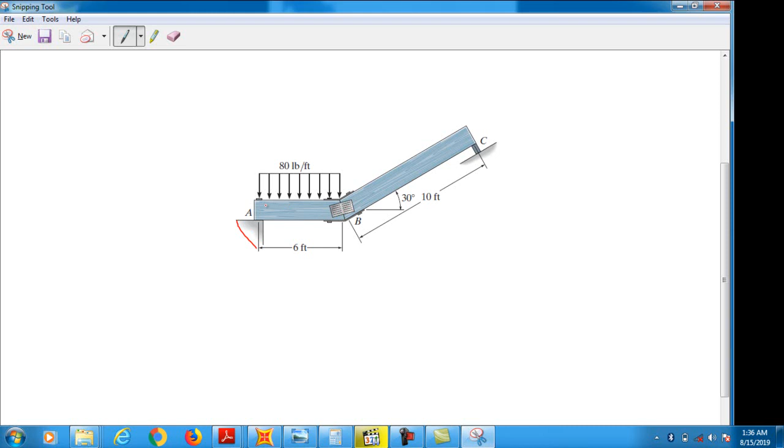So you will understand how we will model such kind of beam, and we also have to rotate this joint, as we did in lecture 14. So the beam is simple. I just want to explain how we will model this kind of structure.

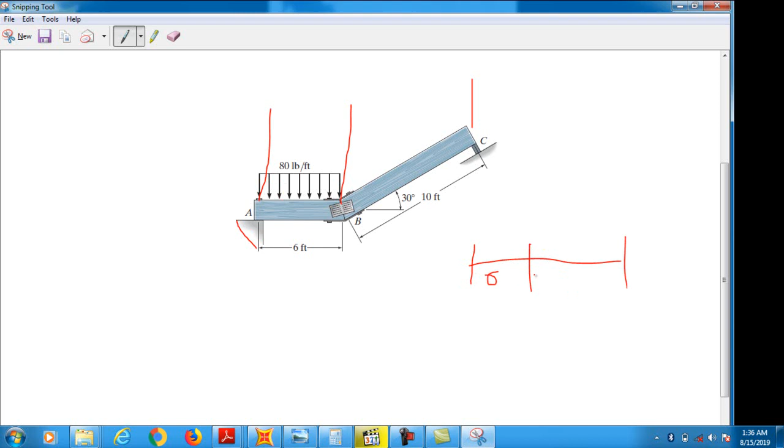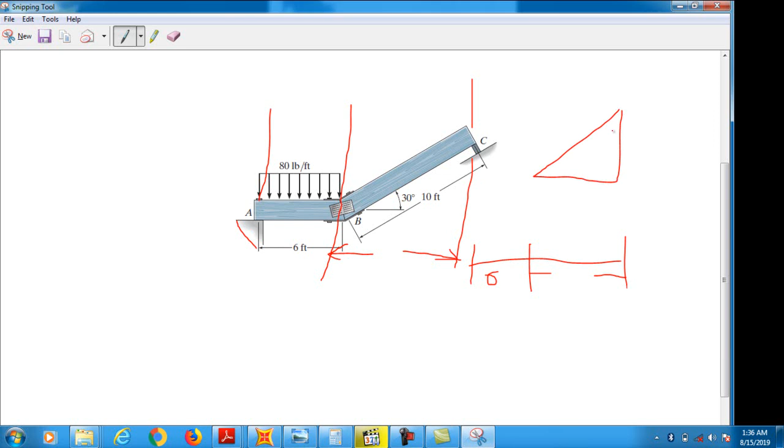So we will use grid spacing. Let's say we have x1, x2 and x3. So in x direction we have three axes, x1, x2 and x3. These two axes are at a distance of 6 feet, and for these two axes we need the horizontal distance, which we can determine from this inclined length and this angle. This is a right angle triangle, using the trigonometric relationships. This is 10.

So using trigonometric relationships, this x distance can be found by 10 multiplied by cos 30, that is roughly 8.66, and this y distance equals 10 times sine of 30, which comes out to be 5. This angle is 30 degrees, so we need to rotate this joint by an angle of 30 degrees. So this is the whole data we need for modeling this frame section.

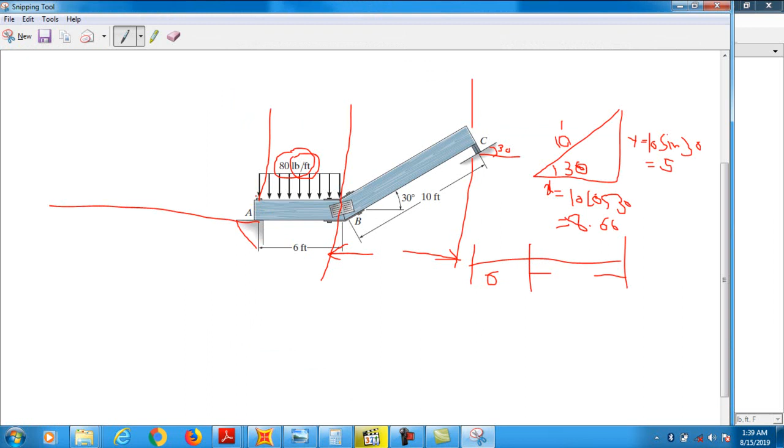80 pound per feet loading is applied, and these are our required units. So let's start. Make sure the units are in pound feet. Select template using grid spacing. Grid spacing: we have three axes in x direction, and in z direction we have z1, ignoring the depth of the beam, and z2, and this height is determined here, that is 5 feet.

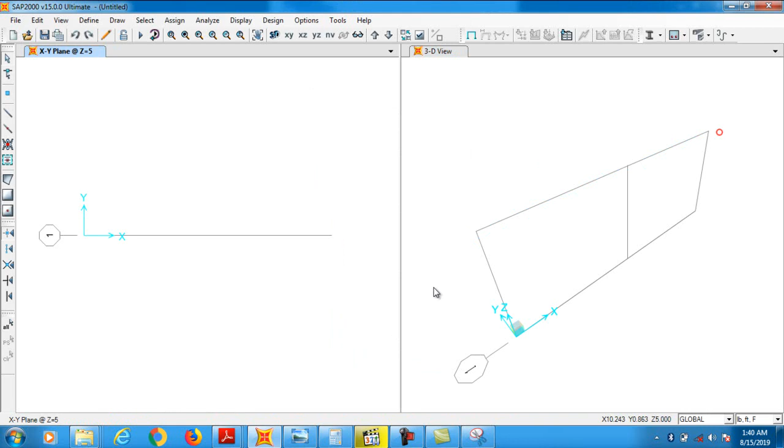So in z direction we need two axes. Let me assume this equals 6 feet. Y is 1, and the vertical height is 5. Now we edit the spacing. Make sure you are in the xz plane. Let's edit the grid spacing, and the spacing unit should be feet.

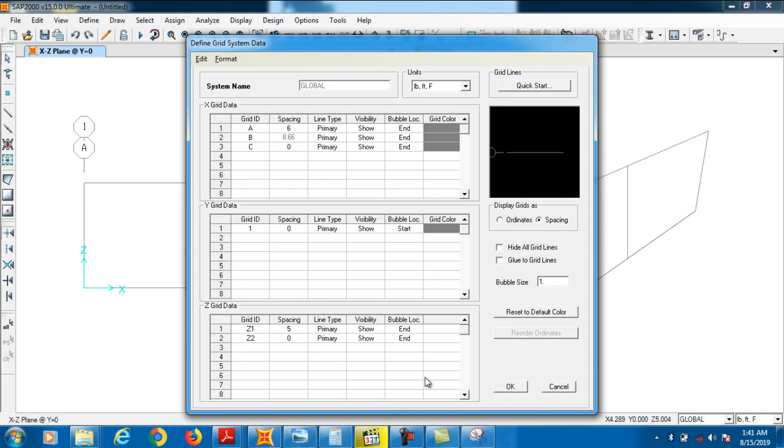Now x1, x2 and x3, you can say this is A, this is B, and this is C. So AB spacing is 6 feet and BC spacing is 8.66. So AB is 6 feet and BC is 8.66. And the height is 5 feet; the distance between Z1 and Z2 is 5 feet. Now these are the grid lines.

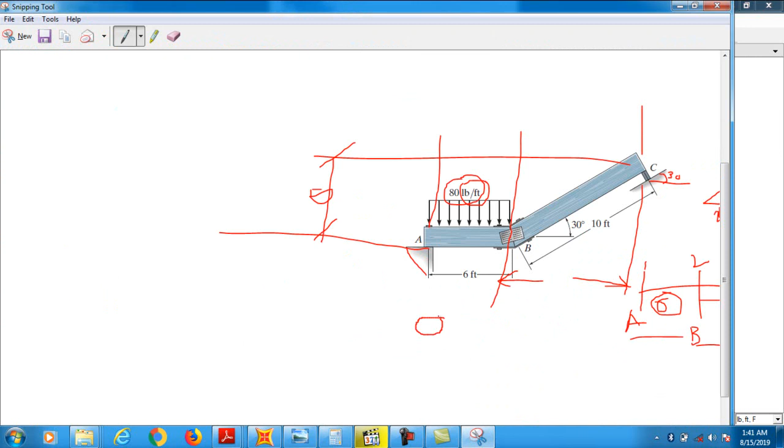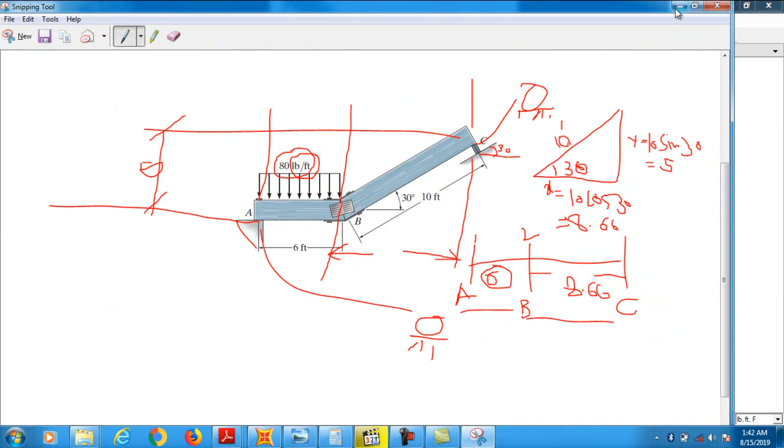Select line element. Click here, then click at a distance of 6 feet, and then click this corner. So now this is your beam. The beam is just placed here, so this is a roller support, and the beam is just placed over here, so this is also a roller support. So select this point, assign, joint, restraint, and OK. Now we need to rotate this joint.

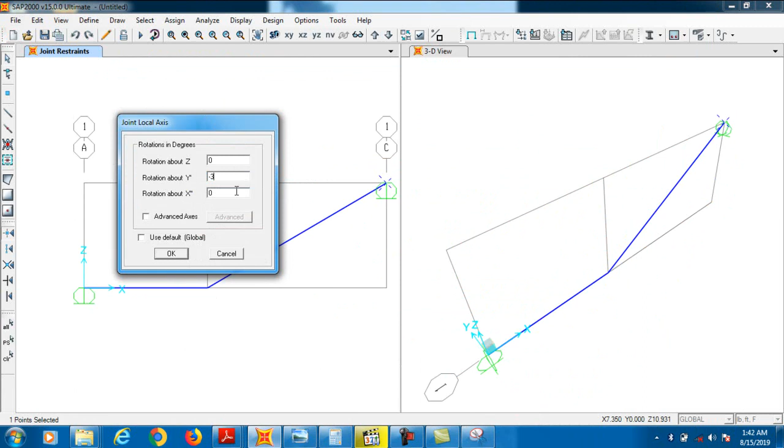Select it, assign, joint, local axis, and the rotation angle is 30 degrees, but the rotation is anti-clockwise, so with a negative sign, and the rotation is about the y-axis. So make sure you rotate the joint about the y-axis by 30 degrees. The joint is assigned, and now assign the loading.

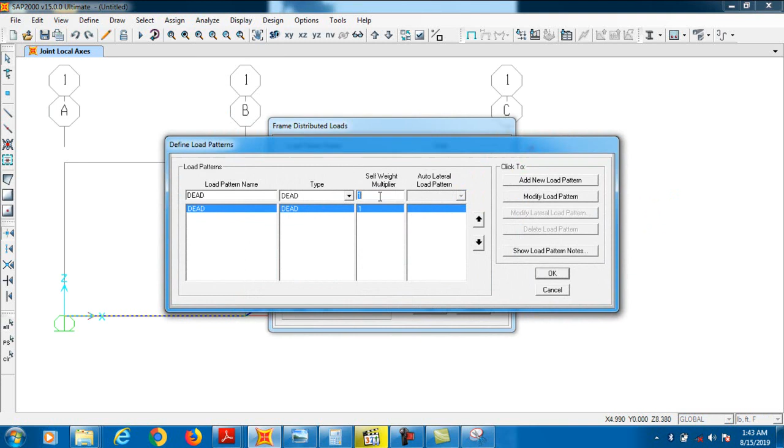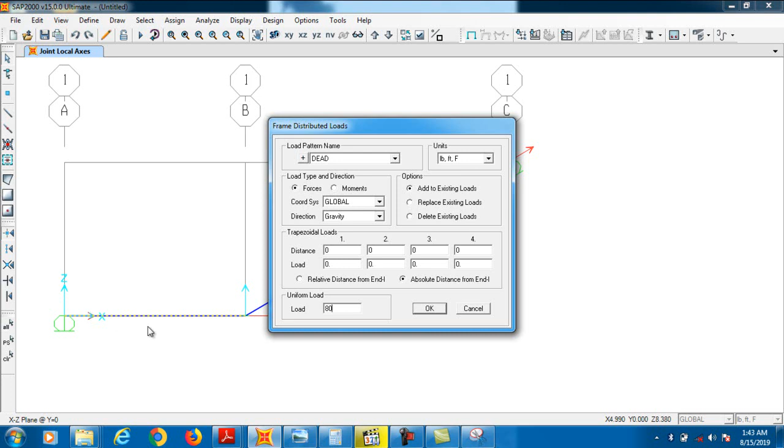Assign frame load, distributed, make this equal to 0. Modify, dead load, pound feet, global axis, direction is gravity, and apply a UDL of 80 pound, because this whole span is subjected to 80 pound per feet. Joints are assigned, beam element is drawn, loading is assigned. Let's analyze.

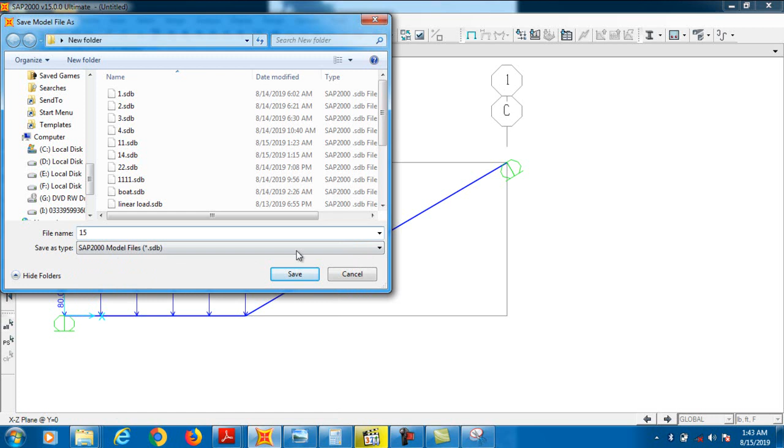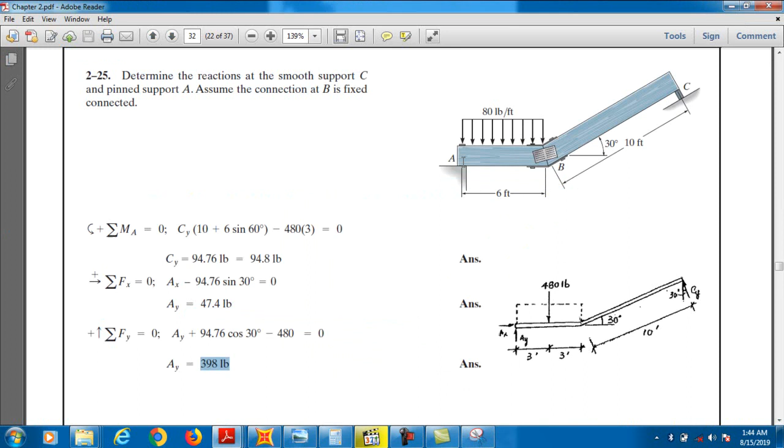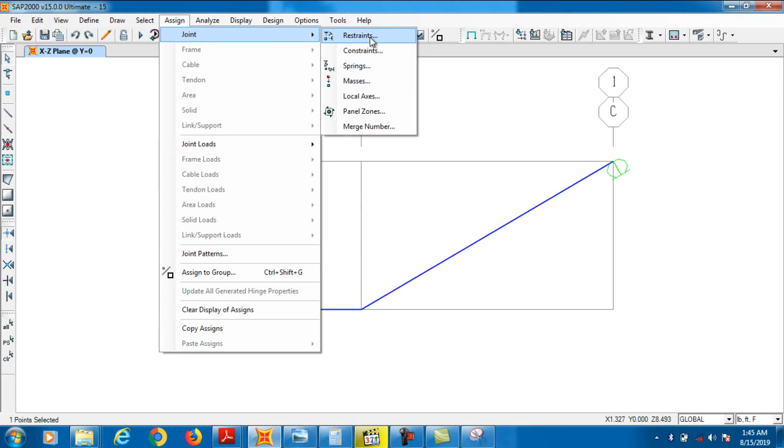You can draw shear force and bending moment diagrams as well. And you must know that this joint is a hinge joint, because it is said that joint A is a hinge joint. Let's repeat the process: unlock the structure, select the joint, assign joint, restraint, hinge joint. Now this joint is restrained. Just make these changes and analyze the structure again.

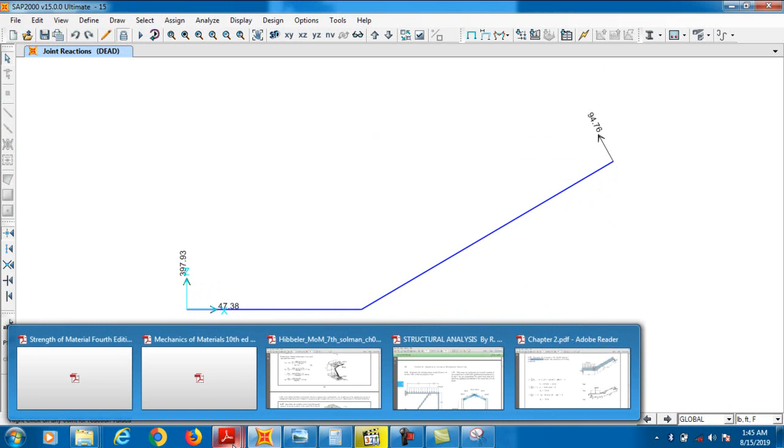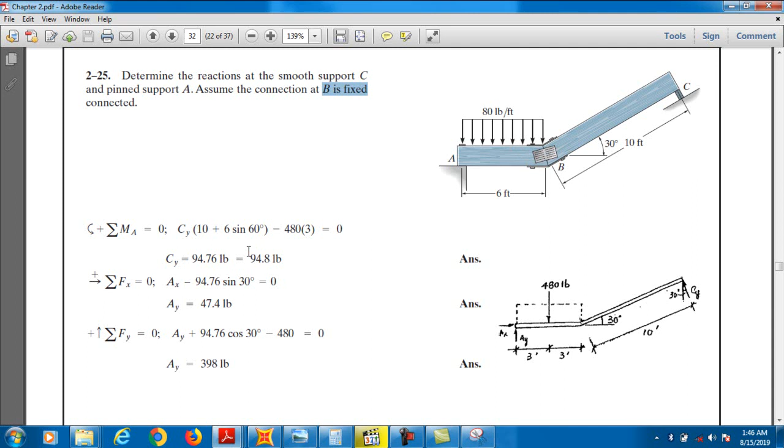So the reaction is now okay. That is the error which I committed, and I rectified it, because this is a hinge joint, not just a roller support. It is mentioned that C is a smooth support, meaning a roller, and A is a pin joint, meaning a hinge, and B is a fixed connection. So now your reactions are 100% okay: 398, 47 and 94.